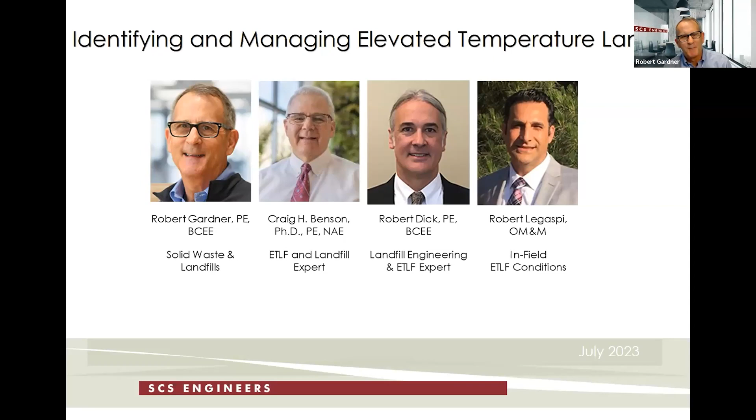My name is Bob Gardner, and I will be your host today for our webinar on elevated temperature landfills, commonly referred to as ETLFs in the industry. I'm a senior vice president with SCS and oversee our solid waste practice, including engineering, consulting, construction, energy services, and O&M services relative to landfills, transfer stations, MRFs, organic facilities, renewable natural gas, landfill gas to energy, and solid waste planning services.

I was talking with an engineer for one of the major solid waste companies a couple of weeks back about elevated temperature landfills. He had been involved with some of the initial investigations and remedial designs associated with the first elevated temperature landfills that we know about today, when everybody was really scrambling to deal with the heat, liquids production, gas quality changes, odors, material issues, and litigation. He had hoped we'd be seeing fewer of these as we go along, but he's been surprised by the elevated temperature landfill conditions showing up at more and more sites. Since those early days, we have learned much about what causes elevated temperatures in landfills and how to manage those conditions through research, engineering, and quite frankly, trial and error.

Today, our panelists include veterans in the landfill industry from the research, engineering, and field O&M and implementation perspectives. Let me take a second and introduce our panelists.

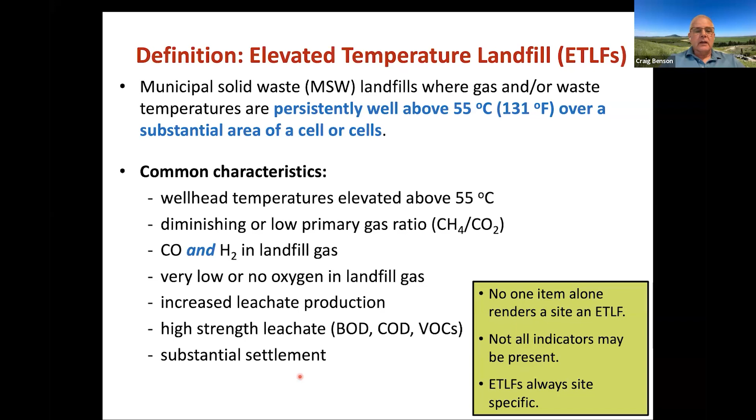What they aren't, and I think this is important, these are not landfills that are on fire. These are not landfills where we have smoldering combustion. There's no combustion or oxidation reaction occurring. These don't have any oxygen to support a reaction. They're also just not landfills where we have an isolated hot well.

In fact, I did a national survey, and about 30% of the MSW landfills in the United States have at least one hot well. So hot wells are fairly common. It's really when we've got a collection of wells persistently above 55 degrees C and 131 Fahrenheit. I want to emphasize that most sites, if they have elevated temperatures that are isolated, don't have problems. ETLFs, while they are not fun to deal with, are a relatively uncommon occurrence relative to the number of landfills we actually have in our portfolio in North America.

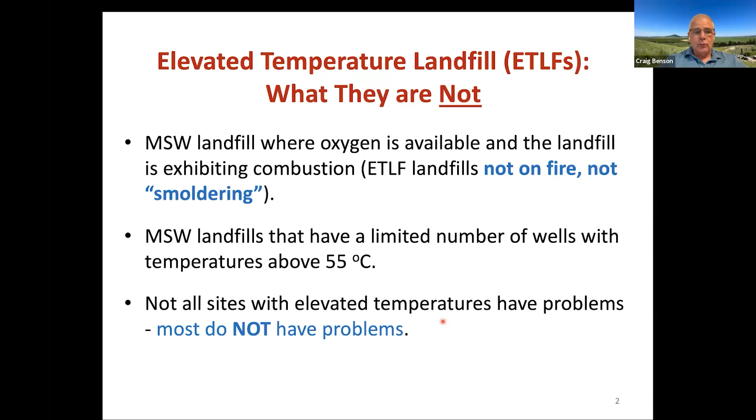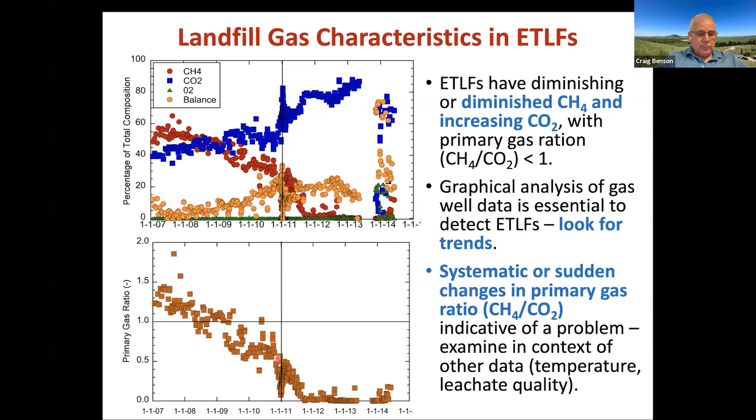One of the things that we don't do enough of in our industry is graph up our data. We often will report data, lots of tables, lots of reports going into agencies, but we're not looking at the trends. One of the things we've learned clearly is watching for trends, examining the data, looking for those telltale signs. One of those is primary gas ratio, methane to carbon dioxide ratio - if it's showing a trend like this, that's an alarm bell. We got a problem, let's look into it. Other things we'll see, I mentioned BOD and COD.

We have a healthy landfill that's well decomposed. Our BOD to COD ratio may be as low as 1 in 10 for a healthy, well decomposed waste. That same waste, if it gets warm or hot, the BOD to COD ratio will climb, largely because we're decomposing organic matter in the waste and liberating it into the leachate. That will have higher BOD and higher COD as well, both will go up, and the ratio of those two will become closer to equality over time. So BOD to COD is a good indication as well, watching that temporally over time.

We often see as well that many ETLFs occur in wet sites. We'll talk about why that is in a bit. If we're looking at dual phase extraction in wet sites where we're pumping out gas wells, we have a liquid pump into the gas well, examine that data. Look at the leachate chemistry in the gas well. If it's climbing in terms of BOD to COD ratio, that's a problem.

Another thing we'll see is the pH will tend to drop from healthy conditions of high 7 to 8, down to 5 to 6, largely because we suppress the methanogenic bacteria that consume our hydrogen in solution.

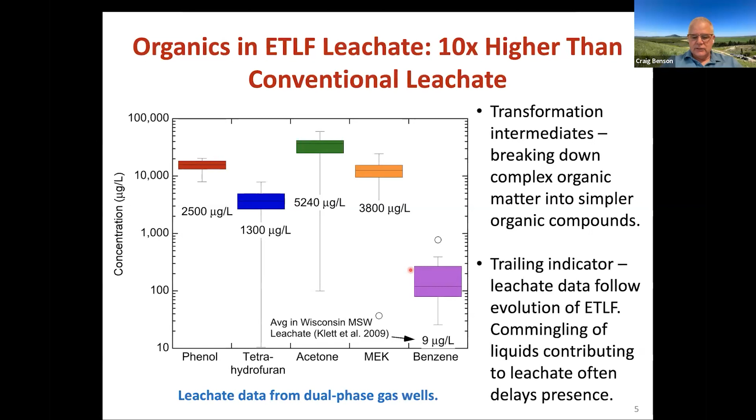Because we have high temperatures, we often have perched layers or confining layers within our waste mass that allow pressures to build up. We will get superheated, pressurized leachate at depth. Sometimes we'll have leachate that's at temperatures on the order of 300 degrees Fahrenheit and still liquid. You might say, how's that possible? It boils at 212, but that's because it's under pressure. One of the things we'll see is high pressure conditions. This is something we really need to be careful about. Robert will talk about that a little bit later.

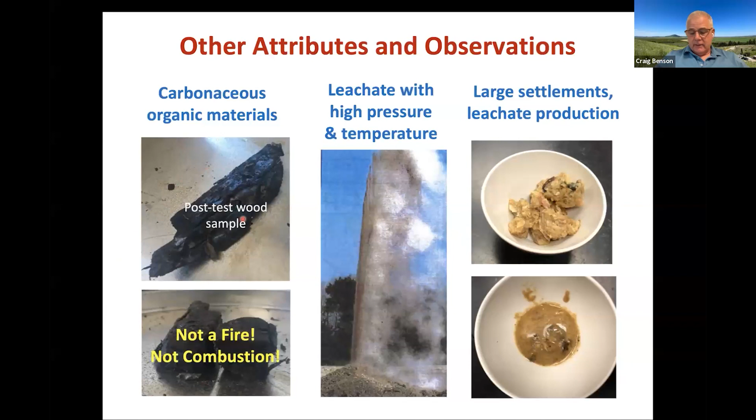You might ask, why do we get leachate that's so strong and odoriferous? What's actually going on?

If you have a crock pot, if you do this over the holidays, you're seeing this all the time. You put all your nice organic material in the crock pot, you put some water in there, that's leachate in our landfill. We put the lid on, we turn the heat up, and we let it sit. This stuff softens up. The materials within the solids decompose, break down into our leachate. We get a nice aroma in our crock pot. We don't get quite as nice an aroma in the field, in a landfill, but it's the same phenomena.

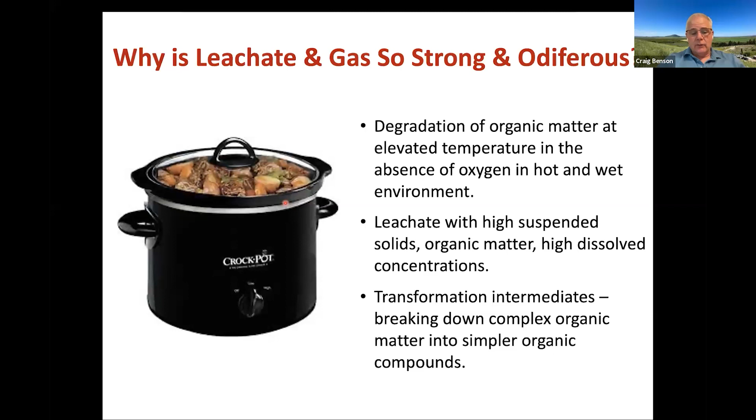It's just that breaking down of organic materials under elevated temperatures, under anaerobic conditions, just like we'd have on our kitchen counter, very similar conditions. It's an endothermic pyrolysis reaction.

Now, those are all the things that we see. Why do they happen? Why does this happen in landfills? What's going on? In our conventional landfill, like I showed here with my simplified schematic, we've got heat that's being generated from microbial communities, and we're pulling that heat out regularly. We're pulling it out through leachate, we're pulling it out through gas, it's radiating into the subsurface, it's also radiating into the atmosphere, and it's being convected away by wind. And in a healthy landfill, we're in a balance, a thermal balance between the heat losses and the heat that's generated by our microbial community.

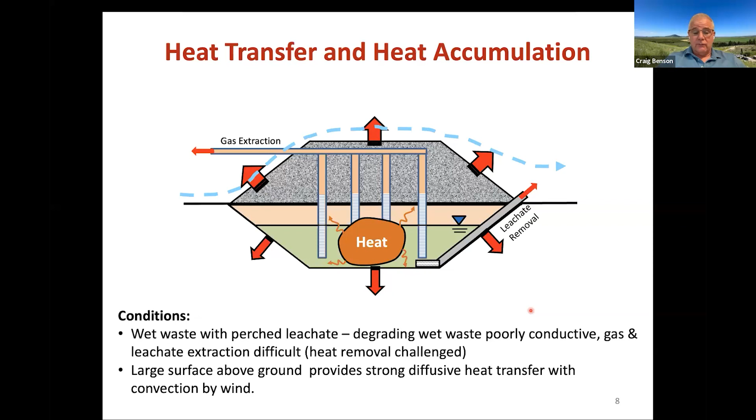Let's put in a waste form that generates some heat, and then things get out of balance. Because it was in equilibrium before in our natural condition, when we add some heat, we don't have an ability to radiate it away. And as a result, the temperatures build up. I believe in most ETLFs, they've built up for years before we ever see them. And then we have to deal with the ramifications of that.

What may cause those? We spent years looking for the smoking gun. We didn't find the smoking gun. I think there's lots of smoking guns out there, but waste forms that we bring in as special waste - commonly oxide hydration reactions are one potential cause. They tend to be pretty quick, so they may not be the most significant factor. Carbonation reactions, for example with coal ash, are long-term slow release reactions, but very exothermic. And then corrosion reactions as well from different types of metals, where they're very strongly exothermic and potentially fairly slow reactions. So we're building up that heat over time.

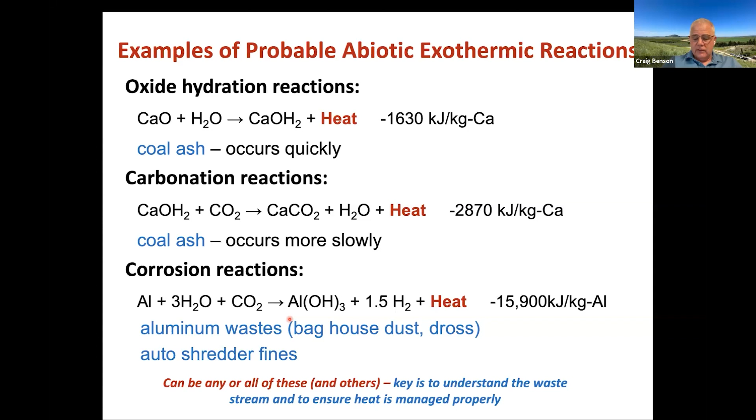One of the things that we've learned is to look at our special waste carefully before we accept them and think about how to dispose of them without causing a problem in our facility.

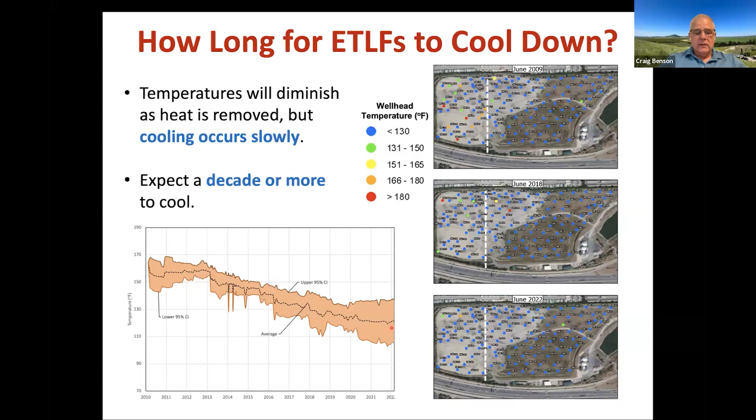So what are the things that we found to be really critical actions? And we'll hear more about these from others. Remove the heat. Get the heat out of the landfill. That's what's causing the problems. Dual phase extraction wells at wet sites are one of the best ways to do that because leachate has a lot of heat in it. We pull the leachate out, we're pulling the heat out.

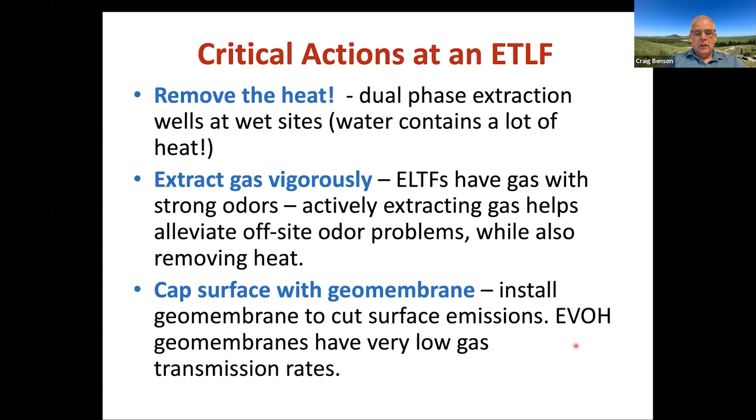Extract gas vigorously. ETLFs have strong odors. We want to extract the gas that's going to alleviate offsite odor problems while also removing heat. And we all know offsite odor problems cause us lots of other problems as well. And then cap the surface with a geomembrane - installing a geomembrane to cut surface emissions while we're managing and removing the heat to minimize odor emissions as well. And we found that the EVOH geomembranes really work well in that regard because they have very low gas transmission rates. So that's a kind of a quick whirlwind tour of what I've learned in the last 15 years in this topic.

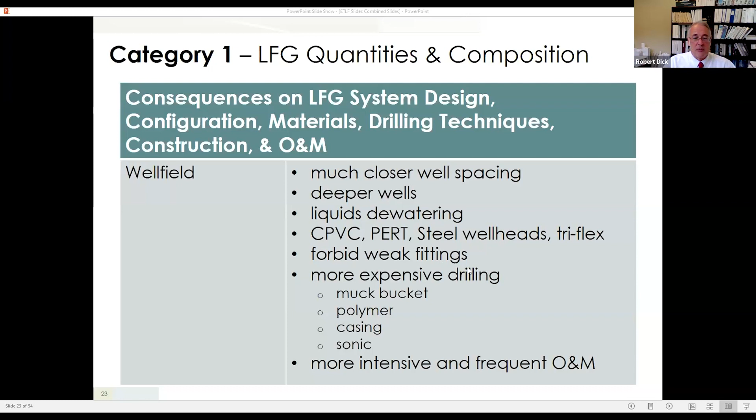If I switch over and talk about the design circumstances at the gas mover system and the combustion units, what I call the control apparatus for landfill gas, you've got a dual circumstance afflicting you. Number one, your gas quantity goes up. Remember your ideal gas law, PV equals nRT. As the T side of the equation increases dramatically, the volume of gas is going to increase. So you just have more of the stuff, gas.

And as if insult wasn't enough to injury, now it's got substantially degraded BTU content, so it's more difficult to maintain combustion. You have to consider potentially things like a thermal oxidizer for this reaction gas. It doesn't have near the BTU content of good old fashioned landfill gas because it's being formulated in an abiotic environment, so you have a decrease in that. You have to think about your flame arrestor and perhaps even introduce supplemental fuel to maintain combustion.

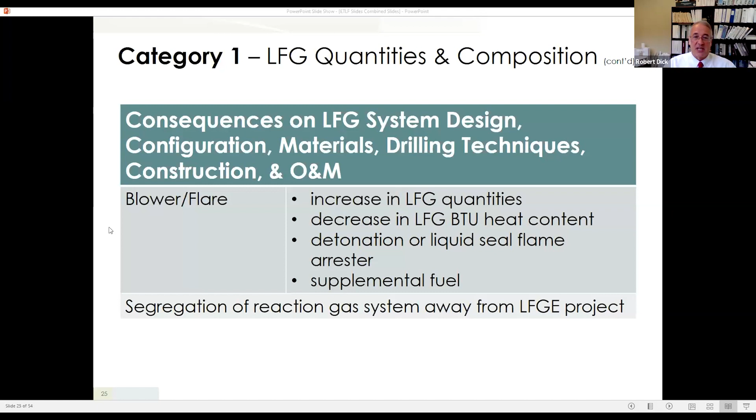Bottom line is a lot of these ETLF sites, as Craig pointed out, are oftentimes large, deep, and wet landfills. So there's usually some portion of the waste matrix that is behaving normally under methanogenesis and can be preserved for your landfill gas to energy project, as you attempt to resuscitate the bad acting portion of the waste that's misbehaving in an ETLF, which necessitates the reaction gas to be segregated.

I know you were going to ask me about the common strategies for heat removal and the techniques. Craig hit on this a little bit - really what we've seen as a pragmatic and practical strategy for heat removal is through fluid extraction, both the liquid and the gas. What you're trying to accomplish is some impediment to the propagation of the reaction into those portions of the waste that are unaffected at that moment in time.

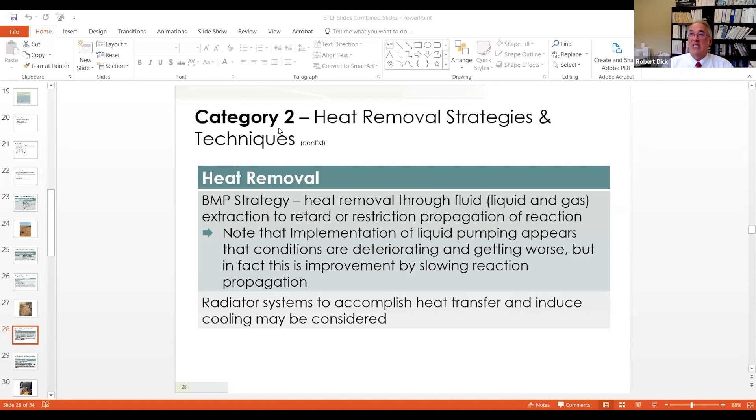And then also, as Craig pointed out, over a long period of time you can actually cool the reaction zone, the hot zone, and restore it to proper methanogenesis. I have heard of others - I've never been involved in a project that attempted to implement a radiator system or some sort of heat exchanger. We've talked in the industry about the idea of geothermal, where you can introduce some sort of liquid to waste matrix heat transfer and try to get that to work. I think that's interesting and theoretical, but from a pragmatic standpoint, what we know does accomplish the mission is removal of heat through extracting hot gas and hot liquids.

So in terms of the impacts of heat accumulation, what is your sense of some of that and how you manage some of those impacts?

Yeah, you certainly have this issue of diminished methanogenesis, and I talked about that. You definitely have the personnel safety concerns. One of my sites, we debated about putting some steel probes, temperature probes. We weren't even pulling gas or liquid out from that, just the top of the above ground portion of the stainless steel probe casing for temperature monitoring. Someone hit it with the IR gun and said, 'Oh heck, that thing's 205 degrees. Don't let anybody walk up and touch it.'

A lot of times from an engineering standpoint, we aren't used to protecting some of the above grade portions of the assets from just being visited by technicians who might lean against something, in addition to all the other potential exposure issues to the gases and leachate we're trying to extract out there. Certainly the high temps melt stuff - hot gas, hot liquids melt and deteriorate materials that we're relying on their engineering properties to actually perform their function.

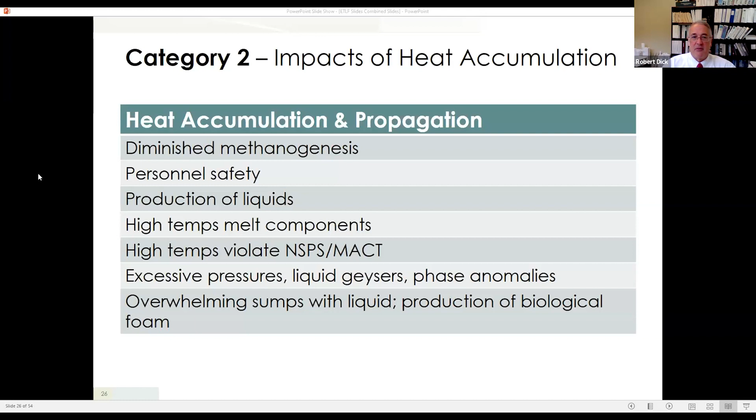And one of those is the biological foam. On the next slide, we have biological foam at non-ETLF sites, but at ETLF sites, as Craig mentioned, the BOD, the COD in the leachate is extremely high. You start agitating that stuff with any type of action discharge, and from an operations and engineering standpoint, we see foam in a lot of places, but it's specifically problematic at ETLFs. So there are management techniques, and one of those is a lot of anti-foaming materials being sprayed in to try to keep that down.

Yeah, one of the questions that was asked was, with the lowering quality of the gas that you have, how do you manage the CO and the H2S odors that come out of the gas and the emissions and the operation of the flare system, for example, whether you have a flare or engine generators. What are the strategies for dealing with that?

Yeah, some of the odor techniques were much more aggressive about recommending things like wellbore skirts at pipe penetrations at ETLFs and foam seals around the soil pipe interface. Odors get out in terms of gaskets and connections, so we use cam lock fittings instead of just a hose clamp. We kind of prohibit any type of hose clamp and always look for hard fittings, whether that be bolted flanges or cam lock fittings for connections.

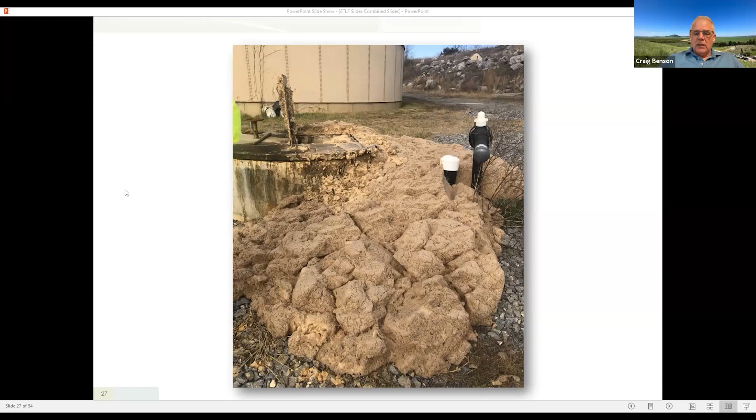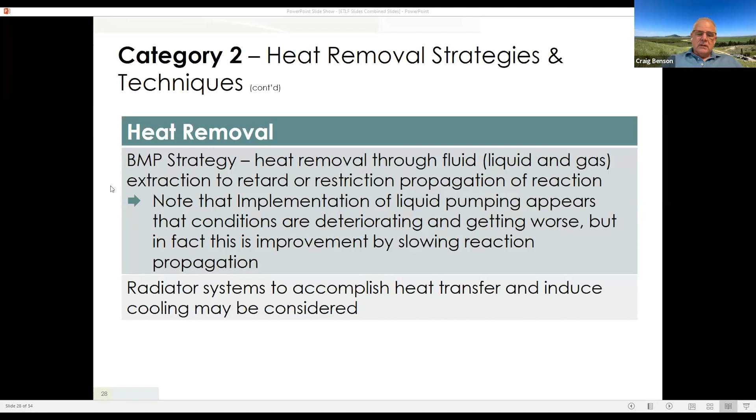Yeah, I can talk a little bit about what it is, and it is ubiquitous and pervasive. We see it at ETLFs, but we see it at other sites too. We've been studying this pretty intensely for the last 18 months, and largely what we found is that most of the black goos, not all of them, but they are polyacrylates. They're a hydrophilic polymer that likes to bind water molecules in our waste stream. They migrate, they tend to get dissolved into our leachate, and then they accumulate in leachate collection systems, and they accumulate in dual phase extraction well risers, where they tend to get sticky and plug up pores and plug up pumps, getting stuck on everything.

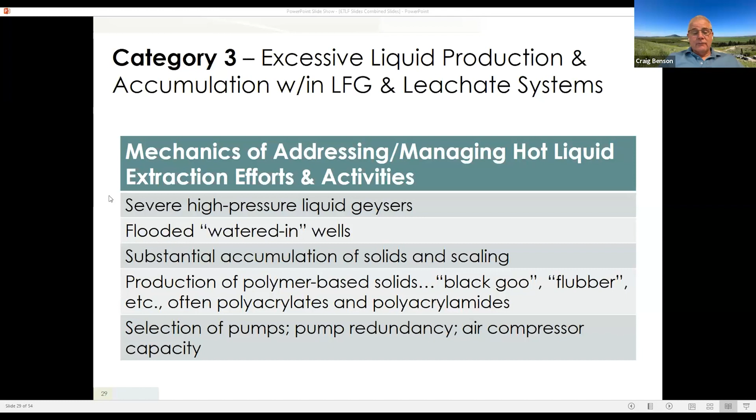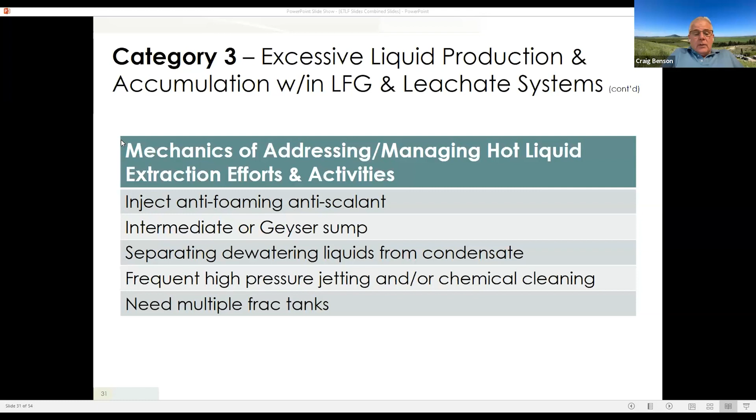And these polyacrylates are things that are in everyday life. If you have young children, you're using them all the time for wastewater control. If you're making your barbecue grill and you've got a steak from your butcher sitting on a pad that absorbs the liquid, that's also got polyacrylate in it. It's just a very common hydrophilic polymer that's in our waste stream, and it seems to be ubiquitous in MSW in North America. We've run into it at some of these sites we've been working at, and it really makes getting some of our dual phase extraction wells functioning efficiently very problematic.

Yeah, and Bob, as far as that ETLF black goo, we work closely with Robert and his O&M folks to institute more frequent pump cleanings and pump servicing. We also oftentimes send samples of the particular site-specific material that's plaguing and fouling up force mains and pumps and even valves within the collection system and liquids management system to different companies and ask their bench scale chemists to come up with some formula that'll work well to break that down. We oftentimes are involved with chemical cleaning companies trying to identify what of their products might be especially effective at removing that stuff.

One of the questions we do have: we'll put in dosing pumps with those chemicals in our force mains for the leachate extraction, but unfortunately in the wells themselves, those pumps are going to be fouling, and it's just a matter of monitoring them frequently and changing and cleaning them frequently. So it's very labor intensive keeping those pumps up and running.

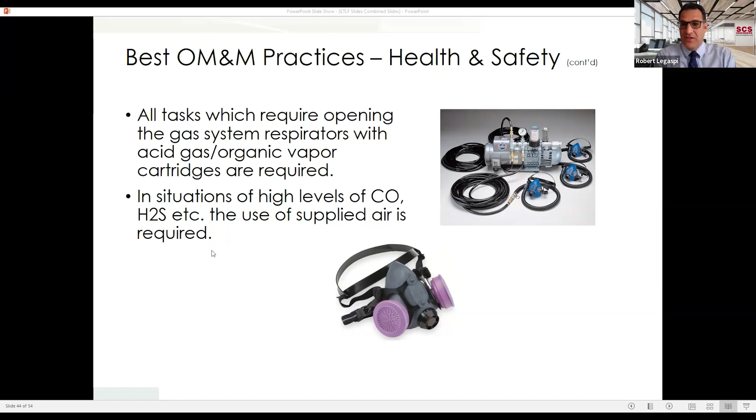That's right. I've seen cases where you have a 3-foot depression in a swale where gas will accumulate, and there have been people who have actually died in those kinds of situations. So the physical configuration is important - would you agree? Oh yeah, exactly. That gas can accumulate in a low spot, and especially if you're in a quarry, the whole landfill is a low spot, so it's looking at it from a whole different perspective.

I asked Bob this question, so I'll ask you the same one based on your field experience and perspective: what are the challenges you face with liquids management and high temperatures at these landfills? What are the things you're looking at and how are you addressing them?

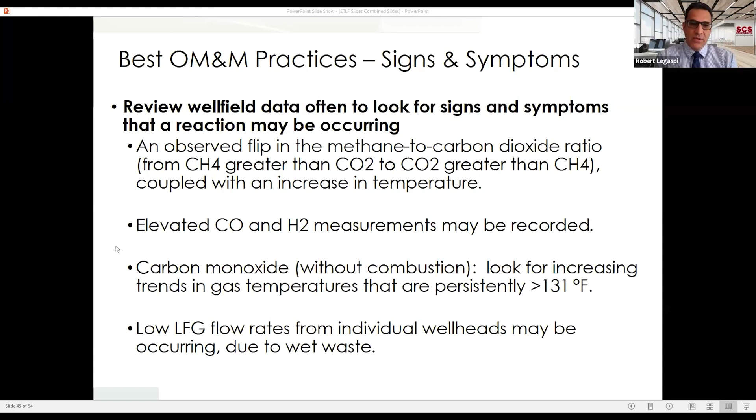Well, what it is, is manpower - everything's going to be more labor intensive. Once you start trying to pull out those liquids, the sumps get fouled, or the pumps get fouled quite quickly. So it's a whole management plan where you're tracking those pumps, seeing how often they're cycling, and choosing which wells or pumps have failed. You're identifying those and creating a program to change them out on a regular basis. So somebody's going out getting that data, and then you have another crew actually doing the changing - that's from the liquids management side.

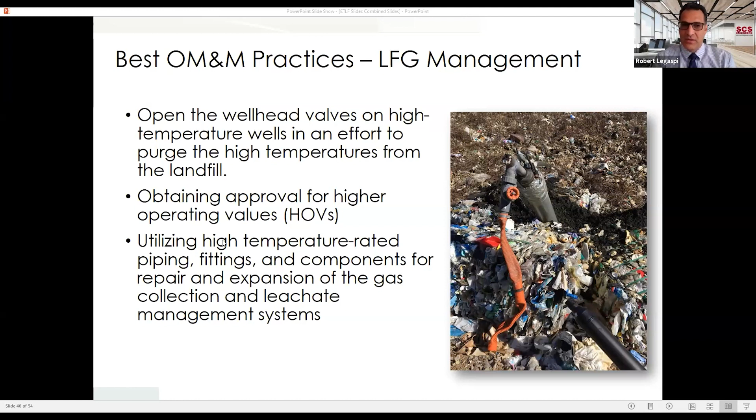And then when you see the temperatures, like they were also talking about, here's a melted wellhead. So you're using materials that won't melt - as Bob was saying, that could be hot at the surface. The technicians need to be aware of that and wear the proper gloves when coming in contact with those metal surfaces, metal valves, and wellheads.

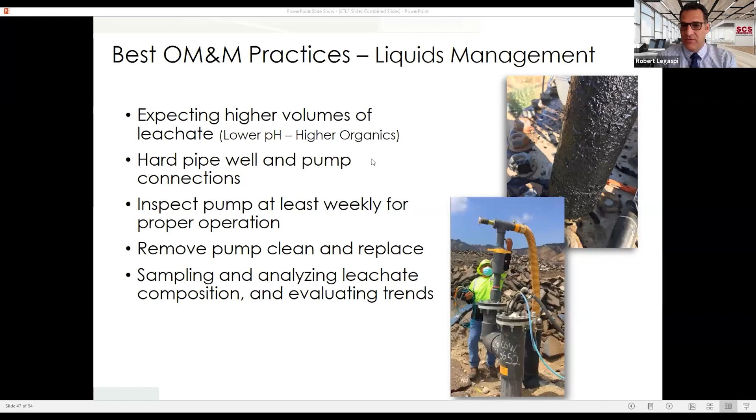Also, here's a good example - you'll see in the top picture how gooey, and now solid, the solids build up on those wells and make them fail. But we use a cactus-style wellhead, so we can keep vacuum on the well if we need to pull the pump, and everything's hard-piped. So as we start to pull the liquids, you'll see geysering still occurring, but it'll occur internally into the well, and then the liquid will go into your vacuum header. That's also an issue, because you can start gunking up your vacuum headers with scale.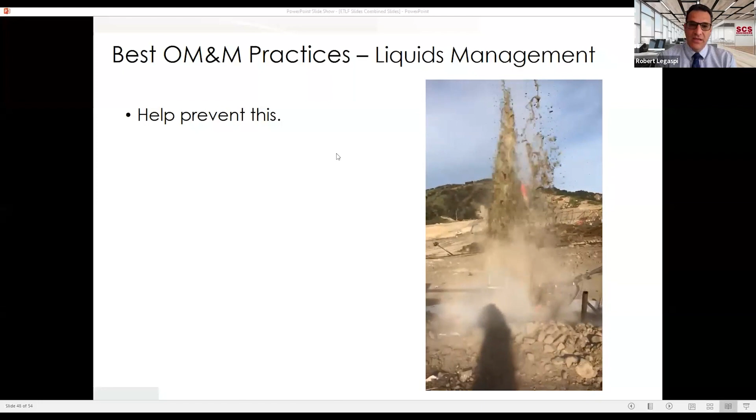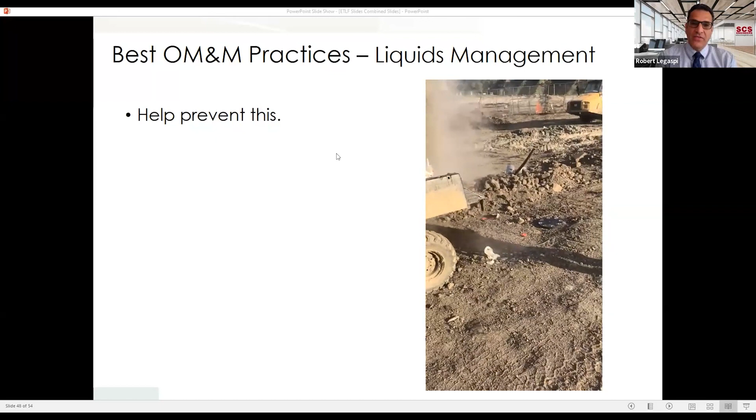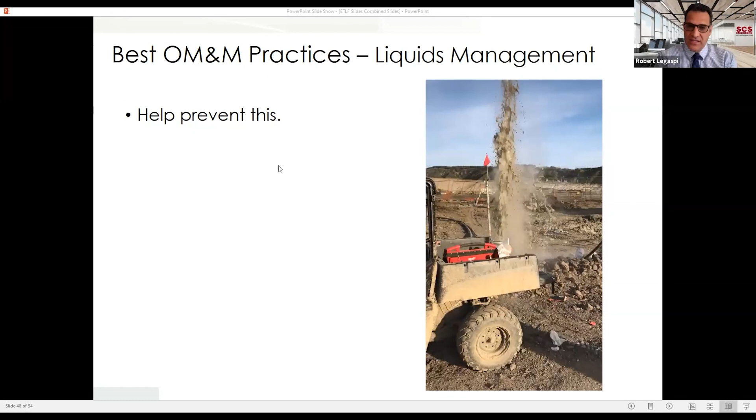And then here's an example of an active geysering well. Really, to handle this, you just have to let it settle down and get that pressure out. But you will get equipment out there, will berm the area so the liquid doesn't go all over the place, and then test the atmosphere and make sure it's safe for the guys to go in there, and they'll most likely hard pipe it with a cactus style wellhead and put a pump in there, so we can start extracting that liquid and extracting the gas as much as we can.

So in terms of dealing with these sites, what tools do you use to track subsurface?

Like Craig was saying, tracking and trending is the most important thing. So you need to be tracking and trending. At SCS, we have a set of tools we call SCS e-tools, and we're able to filter all of our data and look at different data points. We can look at the CO2 to methane ratio, we can look at temperatures, so we can filter and trend that data to start to see where our areas of focus need to be. So that would be our data services for our wells.

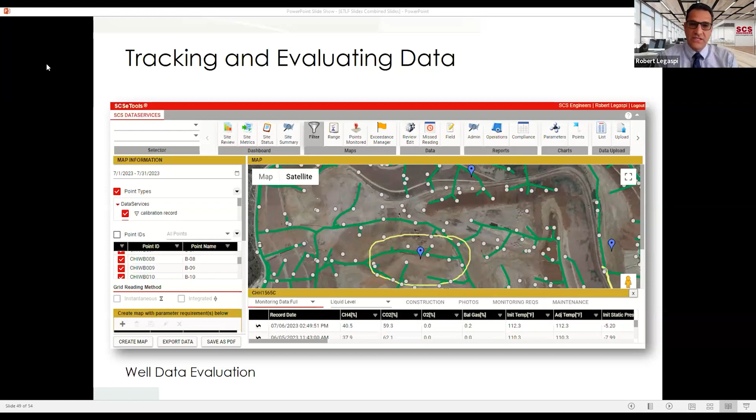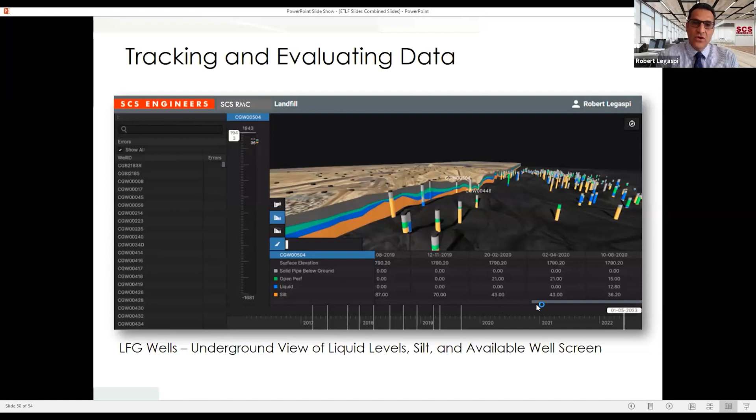Here's another SCS RMC. This is to trend the liquids and silt in your well screen. So we're looking at the health of our wells over time, showing what screen you have available. This is over time here, you can pull that across and it'll show your liquids in the landfill as it goes through time.

And then this would be tracking temperature. We also have, like Bob was saying, thermocouples in the landfill, and also thermocouples on the wellhead, so we can see real-time data of what's really happening, instead of just getting snapshots as you're monitoring the well once or twice a month. You'll have real-time data to see what's actually going on.

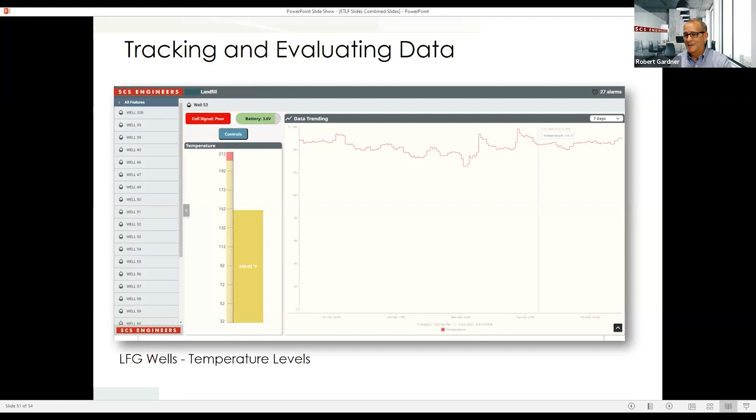And I know from a regulatory perspective, we're working on several sites where this kind of data is not only important from the regulatory perspective, but citizens are also interested. We've had a couple of situations where this data is published on a semi-periodic basis, so they can see what's going on at this landfill located nearby. So it's kind of interesting.

And here's a photo here, on the left is real-time data of the wellhead temperature. And then the photo on the right is a thermocouple that's in the landfill, a borehole thermocouple. They're reading just the temperature in the waste mass as it goes down. So that's helpful to see where we're really at and what the real temperatures are that we're dealing with.

And another case on the right, just in terms of temperature and material compatibility, those are some issues we had to wrestle with. Because when we did some initial monitoring of temperatures, it was at one temperature, and then as you got deeper, it actually got a little hotter, so we had to change out some of the materials we were using so that it would perform. My advice is think hot, plan for hot, and be conservative. That's probably the smartest thing I could say.

One of the questions that was asked, this kind of gets back to the black goo question: the person says we have force mains that have a mix of gas condensate with leachate, and they're wondering, does that contribute to the black goo? It's a good question, probably hard to answer. I don't know the answer to that one.

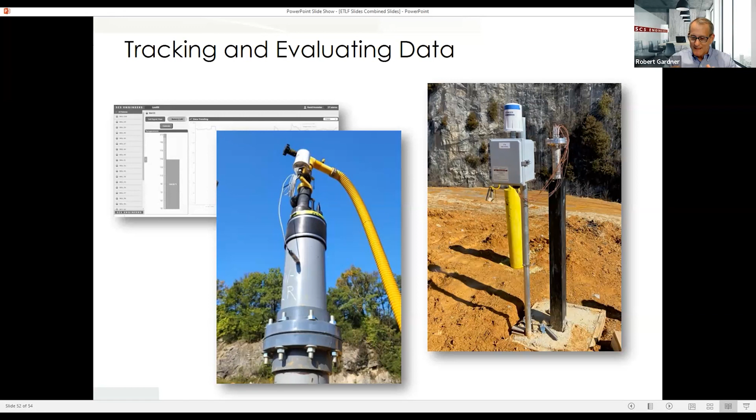I think, Craig, your point about the temperatures, in terms of, you've got a temperature where these various plastics melt, to me is a really good indication of what's happening in the process, you're hitting that point and stuff is flowing, flowing into the wells. And there may be other reactions occurring, with the gas condensate plus the liquids. There could be other chemical reactions creating problems. We've seen things like, what do you call it, almost like clear ball bearings that form, all kinds of weird stuff happening in these various reactions out there.

It's just my speculation, but I suspect that the black goo, the polyacrylates, probably do not originate from the pure condensation process. In other words, you take a saturated gas and you change the pressure or the temperature to result in liquid separation and the knocking out of just gas condensate.

I suspect that is not the source of black goo. But if somebody says, well heck, I just have a condensate sump, no dewatering liquids, my condensate sump is showing up with black goo, then what I suspect is happening is liquids from the well are making their way through the wellhead, right Robert? That happens, so while you think you're just getting pure gas condensate, you may be introducing leachate from downhole in the well because of those high pressures, that geyser type thing.

But I know the question was really about, hey, we're commingling gas condensate and leachate in a single force main, finding black goo. I'm not sure that it's wrong to say, or that the black goo is originating because of the commingling.

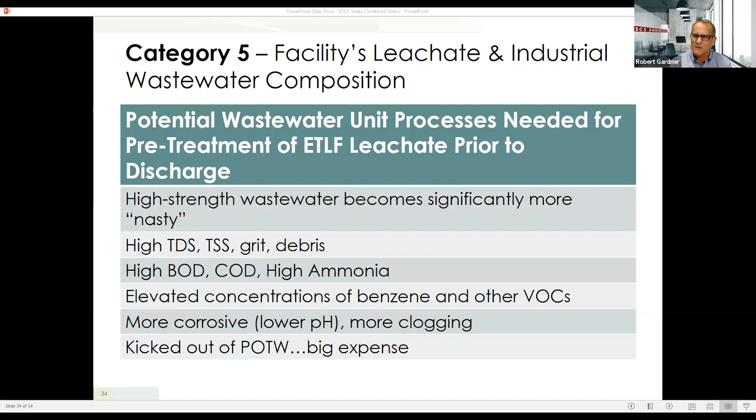Well, it's first and foremost, it's always safety out there. Know that when this is happening, it's going to take a lot more manpower and a lot more hours with engineering and O&M and all those things. Like Bob was saying, it's almost a war zone at times out there, just trying to keep on top of all the things that are popping off.

So, Mr. Dick? Yeah, just number one, react in a manner so as to stay focused on pragmatic and practical execution of the solutions, the best management practices, and try to keep your site from becoming a science experiment or a scientific study by the regulatory agencies. Easier said than done, I know.

I guess the ETLF response focus areas or duties are in these 7 categories: system design and construction, heat accumulation and removal, liquids extraction, odor mitigation abatement, leachate treatment, monitoring and sampling, because we do need that information, and settlement accommodation. If you can use those 7 categories to make a deliberate and intentional battle plan and have some strategic visioning for what might happen, that you need to start addressing while you're in that triage moment of war zone crisis management, there are some things you can do to achieve a better outcome and ultimately work your way through it.